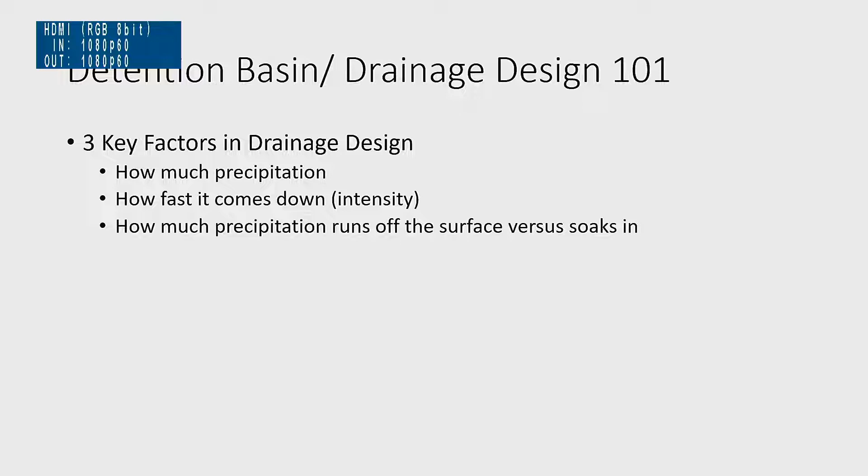In our drainage manual, when you talk about how much precipitation, we narrow it down to design storm events. They're based on statistical analysis of weather records, and the records only go back 100, 150 years. So we do see anomalies, and these numbers are updated periodically by the National Oceanic Atmospheric Administration. If you look at the most recent version, some of these have been changed by maybe a tenth or so, but it's a minor change.

When we talk about these design storm events, we use the term '100-year storm,' and this isn't meant to mean that it's only supposed to happen once every 100 years. Instead, it's meant to mean that it's a storm that has a 1% chance of happening any given year. So it's more of a statistics term.

So if you divide 1 by the return period on that table, it gives you the percentage chance of happening. A 2-year storm, 1 divided by 2, would be a 50% chance of seeing that storm in any given year. Sometimes you see these more often in a year, and typically if the averages are correct, it'll balance out, like in a drought year where you wouldn't see those.

So like to think about it, if you did the 2-year storm, compare it to flipping a coin, 50-50. In theory you're going to see heads every 2 flips, but in reality you might get 3 or 4 heads in a row and then 3 or 4 tails in a row, and that's kind of how a 2-year storm would be perceived.

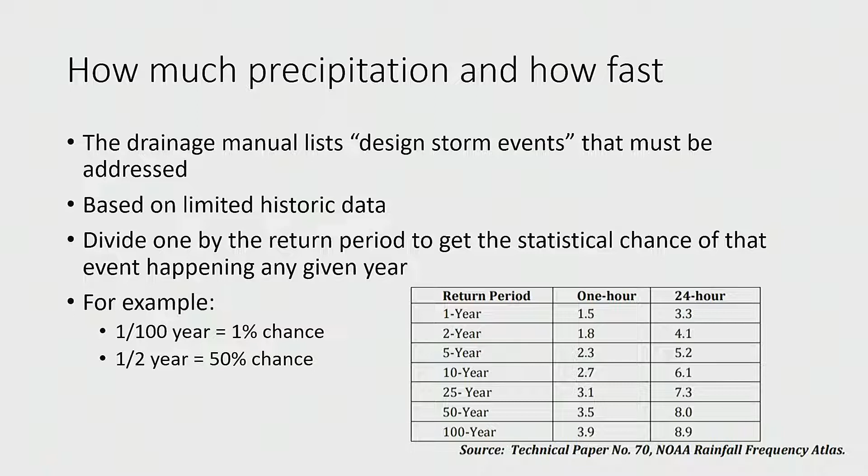Another thing to look at is that we have listed the 1-hour and the 24-hour in this table, but if you look at the charts, there are all kinds of different time periods. I think back in April we had like 3 or 4 inches in a 2-hour period. So you can go look at the charts and see where that compares on the statistics. There's a lot of data out there, but this is just what's in the drainage manual, and the 24-hour is the one that we actually really focus on.

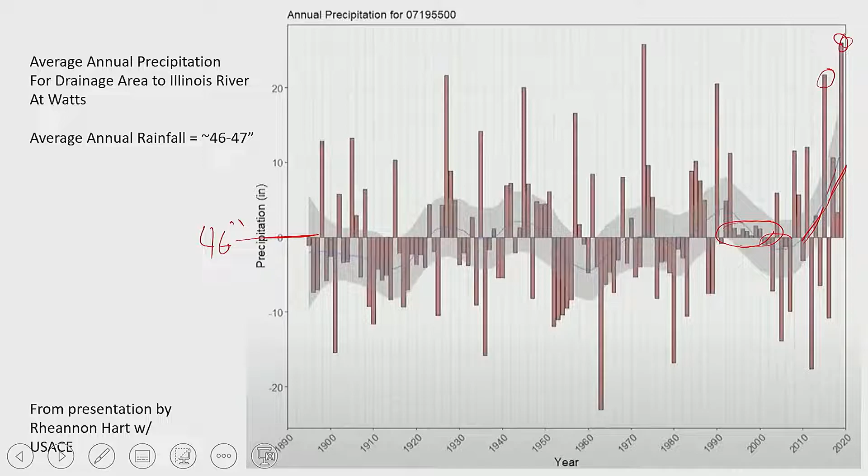For 2019, we compared that with what we recorded at the sewer plant. Someone's out there every day with a rain gauge, and we actually had about 83.8 inches in Siloam that year. And then we had another gauge on the southeast side of town that had 74 inches in 2019. So that could have been the wettest year. We don't have detailed data within city limits, so it's hard to know for sure, but it's definitely up there as one of the wettest years over the last 100 years.

In addition to this annual rainfall, it appears there's also a trend in the Midwest where the rain events are becoming more extreme. The general idea is that we see fewer rain events each year, but we get more rain per event. I've been to a couple conferences where they talk about this more regionally speaking, so I don't have any specific data for Siloam. That's just something I've been seeing some of the government agencies talk about. But regardless of the intensity, the overall annual rainfall has definitely been higher more recently.

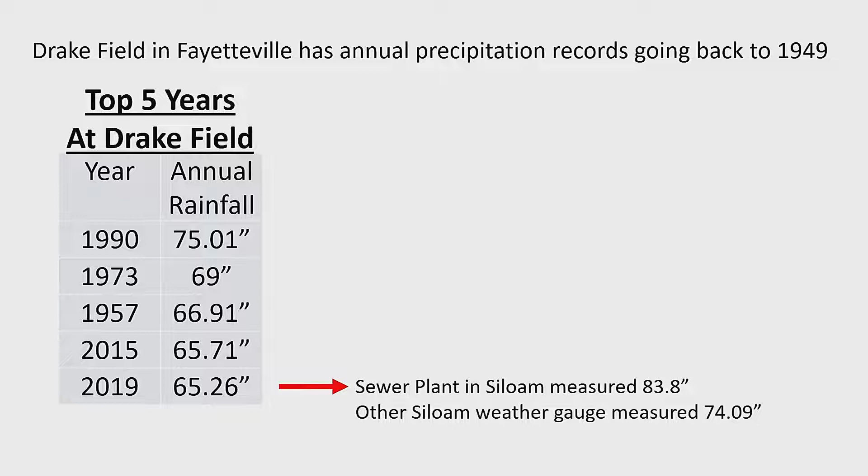So that kind of talks about the precipitation and how fast it comes and how much comes. But the third factor is how much runs off the ground and goes into the ditch and the pipes. The base factor we use to consider this is just what kind of soil we have. Sandier soils have bigger sand particles with bigger voids, so the water can soak through them and drain into the ground faster, meaning less water runs off. On the other end of the spectrum, we have clay soils, which are much smaller and tiny. They compact smaller, and less water is soaked into the ground, so more of it runs off.

So lucky us, we have probably 90% of our soils are high clay content. So we just generally have a lot of water that runs off into the ditches and streams. So what does this mean? Generally speaking, more water runs off the surface into the ditches and pipes, and the water doesn't soak into the ground very fast. But Siloam's always been this way — this is the existing conditions.

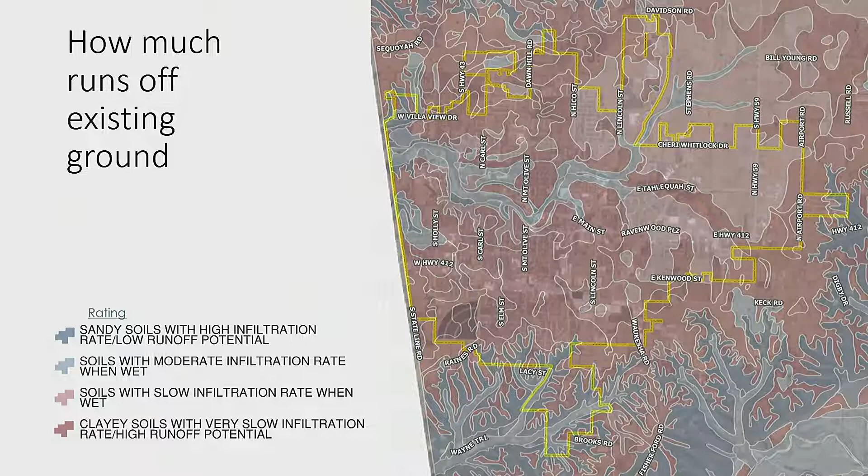So that kind of talks about the summary of the soils, but how do you get from there to what changes with the development? This is the simplified version of all this. But to address this, we look at different ratios for different conditions so that it can be calculated and we can run the numbers.

There are different variations in this — single family versus duplex versus apartments, you're going to see different ratios, but these are just the basic numbers. You can easily see, if you have an open field going to a commercial center, you have over twice as much runoff, and you have to deal with that one way or the other.

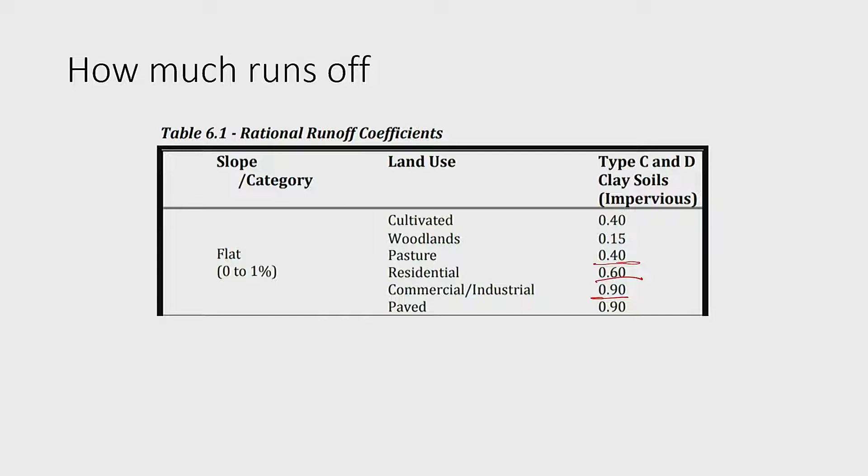So how do you mitigate that? The drainage manual's basic idea behind development is that a development shouldn't increase the peak flow from the site from pre-development to post-development. Typically we do this with stormwater detention, but there's one other way, which I'll show an example of later on — basically by reducing the amount of area that drains to a site in the post-development condition versus the pre-development condition.

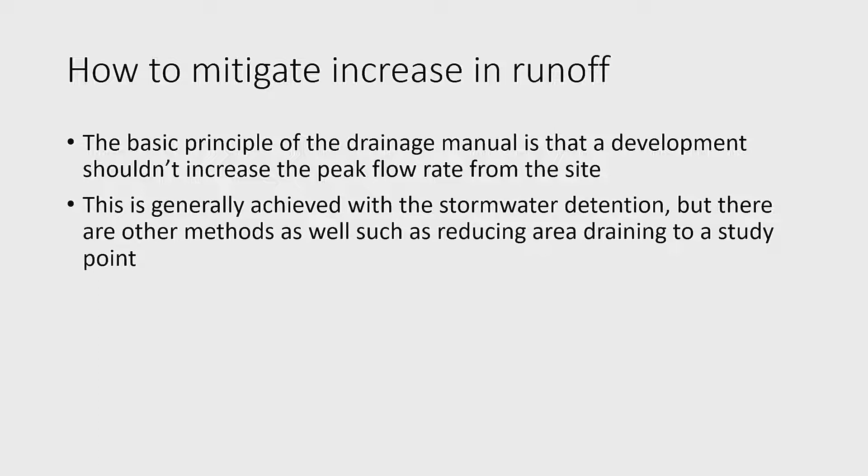So the more common approach is detention basins. The idea is that as you drain all the water to the basin, it slows the water down and holds a certain amount, then slowly releases it out through an outlet structure.

Detention basins are meant to address the peak flows that exit the site, but they don't address any volume difference. You're not really planning on any water soaking into the ground in a detention basin. It's going to be held temporarily and then let out downstream. A lot of times detention and retention are used as the same word, but technically retention basins are intended to actually hold the water and let it soak into the ground, and typically they wouldn't have an outlet structure.

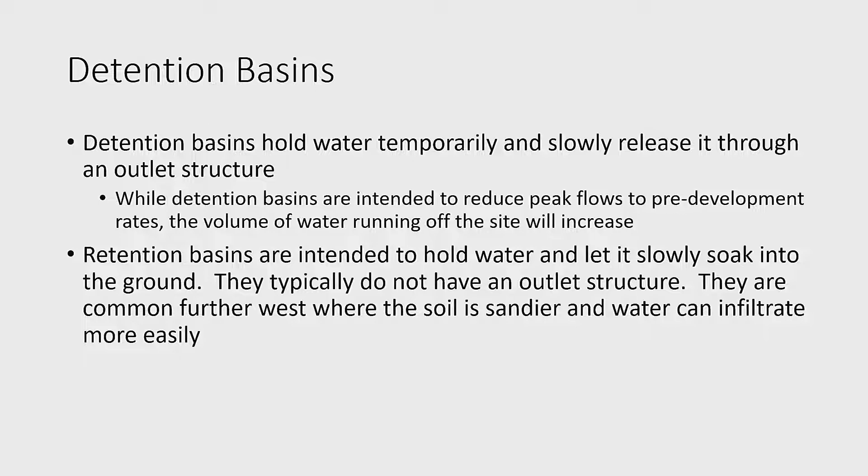I don't know that we have a true retention basin in Siloam. As most of you guys could probably tell, once you start digging down, most of the ground, if it just rains, just fills up and holds the water. It doesn't actually soak into the ground. Out west, like in Arizona, they have sandier soils that can actually infiltrate, and they can address that volume and let it soak back into the ground. But we don't have that luxury here.

Is everybody with me so far on the general stuff? I know this is probably a little boring, but it's just basic stuff here. So just a couple of units that we use for vocabulary. There's really the volume of runoff that we consider, and then the flow rate. Those are the two kind of metrics that we use with drainage.

The volume is the amount that runs off the site. So for instance, if you had a 1 acre tract of pasture land and you get 1 inch of rainfall, you could say that the amount of rainfall that fell is 1 acre inch. It's 1 inch deep over that entire acre of land. And then you can just do those ratios from there.

So like in the previous slide, if 40% of the water runs off and 60% soaks in, you'd have 0.4 acre inches running off. We also use units like acre feet or cubic feet, and those are all kind of interchangeable depending on what your end goal is.

Flow rate is the volume per time unit, so that's more cubic feet per second. That's like what's going underneath the bridge on Sager Creek at any given time—what's that flow rate at that point in time? So those are kind of the two metrics that we're going to talk about here moving ahead.

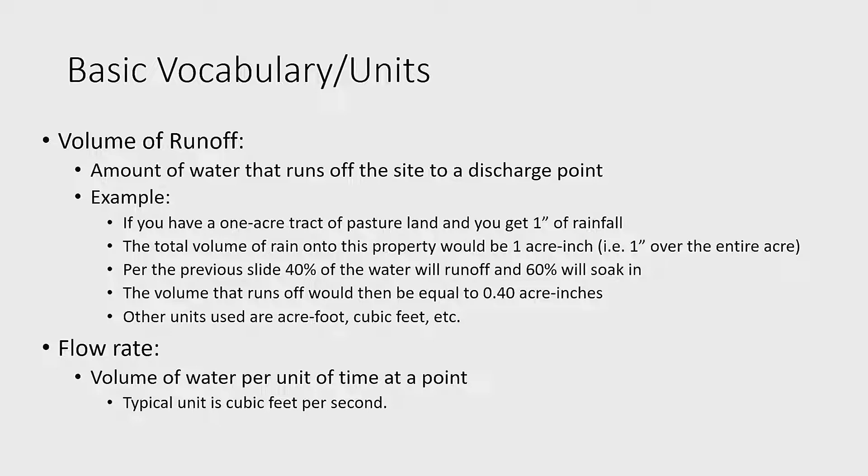This kind of just shows a little graphic, just a basic layout of this. If you assume the yellow line is 1 acre of pasture land on a hillside, you can go back to that 1 inch rainfall over the entire thing. You're going to get 0.6 acre inches of volume that soaks into the ground, and 0.4 acre inches that would drain to the low point of the property, shown here in this drawing.

This low point where all the water drains from the site, that's typically where we do the analysis for any given development. We're looking at where everything collects and where it exits that property. So that would be the point of interest in our drainage studies.

One note on this: if we want to know when the peak flow rate hits that point I circled, you really need that point in time where the entire acre has runoff contributing to it. If this is the high point of the property, that raindrop's going to hit and slowly meander down into one of these little tributaries, and then make its way all the way down here. If it takes 30 minutes to get from the high point down to the low point, that's probably when you're going to see that peak flow rate downstream, and that'll come up a little bit later on. The idea is that you have to have that whole area contributing, in most cases, before you see the peak rate of flow from any given drainage area.

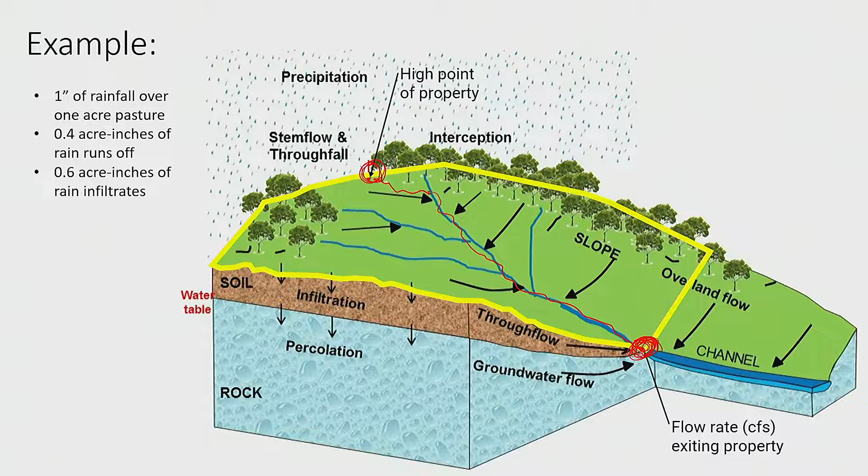This is a simplified example, but the idea is, as it starts raining, if you go back to the other example, we're looking at this study point down here at the bottom end of the hill. So at that point it starts raining, and the water running through there starts ramping up, and then at some point it comes to a peak. Like in that previous example, if we said it was 30 minutes, that's how that correlates. So you get that peak flow rate where the entire acre is contributing to it, and then the rain starts to let up, and the flow rate recedes.

The neat thing about this from the engineering point of view is that when you plot these flow rate curves out, the area underneath the curve is equal to the amount of runoff. There are some handy applications of that we'll talk about later. In that previous example, if you had that acre of pasture, we know there's 0.4 acre inches of runoff. That's going to be the area underneath this curve.

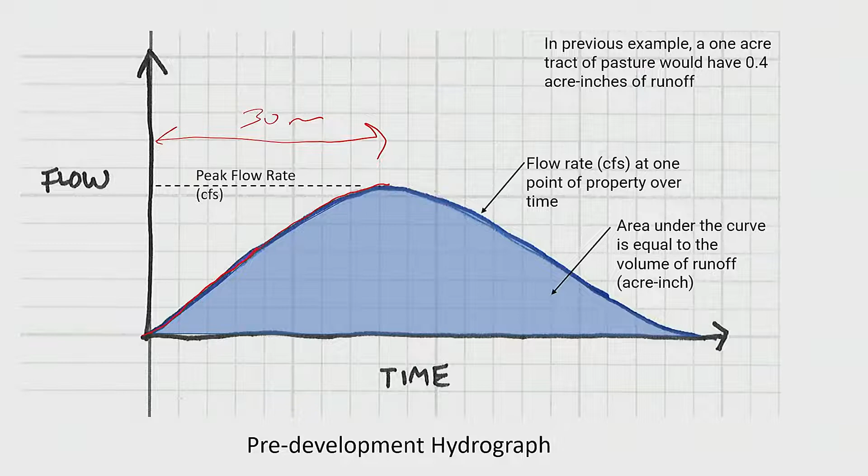So that would be what an existing hydrograph looks like for an undeveloped piece of property. If you were to go in and develop that into a commercial shopping center, that's going to change. You're going to change the patterns, you're going to change how much is coming off. On this chart, the blue is what we looked at before, and the red is this post-development runoff or flow rate curve.

And there are a few takeaways on how this changes things. The first is the peak flow rate occurs more quickly, because as you add impervious surface, pipes, ditches, etc., the water can travel across the site faster. Previously we were coming over here at say 30 minutes before we saw that peak, but now that we're speeding things up, it might be 20 minutes instead.

So you have to deal with that, because that's going to happen. The second thing is that the peak flow rate is going to be higher, and that's just a combination of there being a lot more impervious surface, and it also comes faster as well.

The third thing is, going back to the same point, that the area under the red graph is going to be greater. So if you go back to that one acre tract of pasture land, we knew the pre-development condition was 0.4 acre inches of runoff. And if we look at that chart for the commercial property, it was 0.9 acre inches. So the area under these two curves, probably not drawn exactly that way, but the idea is you're going to have to deal with that extra volume.

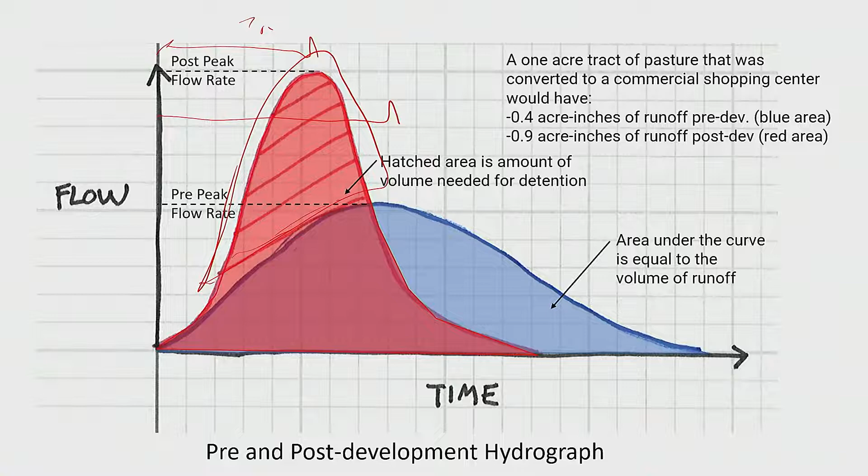So basically, with the outlet structure in the detention basin, you let the water coming out, but then you cap it, and the idea is you would hold that flow rate out of the detention basin so it doesn't exceed the pre-development. That's what we're really shooting for, that you don't get that increase.

But what that doesn't do is take care of any volume. Even with detention, if you go back to that, if you have 0.4 acre inches to begin with, and you go to 0.9 acre inches, you're still going to get 0.9 acre inches of volume running through that basin and going downstream. The detention doesn't address the volume; it just slows the water down so the peaks don't exceed what you had before.

So Justin, does that relate to questions I've had before when citizens come expressing concerns about extra drainage problems when new developments go in? I've asked, will the detention basins in the plan help the existing problems? And I felt like you thought they would, so is that the case? Where there was no detention basin before, could this help even existing problems that were there before? Yeah, even though you're saying the flow, I mean, despite the impacts you just mentioned.

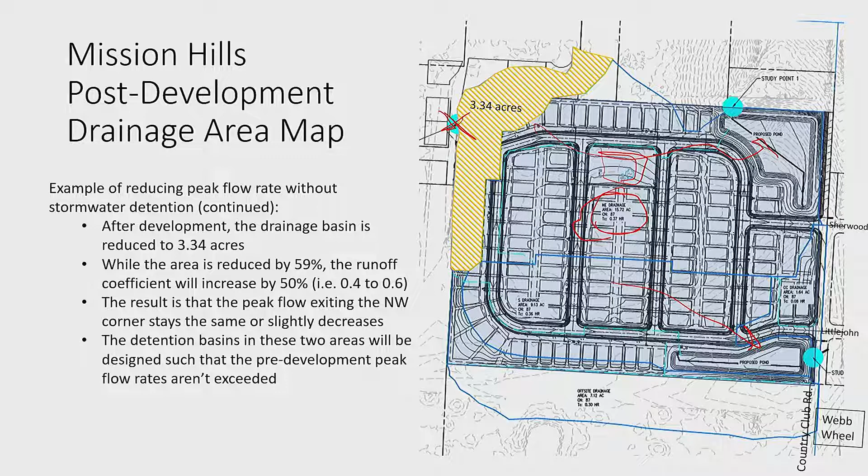And there's homes there to the left of that 8.13 acre area? Is there another addition right there? There is, it's called the Crossing Subdivision. There's a ditch that actually comes down between these houses, with a couple of cul-de-sacs right there. So they're discharging - this property already drained into this ditch that headed west down the hill, so it all goes to the same place it previously did. We're just manipulating it so that even though we're adding more impervious area, we're decreasing the area so that peak rate stays the same or decreases.

So the Mission Hills subdivision has been approved but not started building yet. The one below, Endura Park, that one has started. Mission Hills, I think they just broke ground, they've started work on it. Endura, they've actually final platted and started building homes on it. They are building homes on it.

Justin, the other thing to note on that northeast is if we go back a couple of years on Sherwood and Little John, those developments there, and the neighbor right to that northeast detention pond who didn't want Siloam to develop because they wanted to live in the country for the rest of their lives, but next to the city limit. Davidson Road, that is the lowest point - and I'm just speaking specifically for Ward 2 - the lowest point for the largest discharge where we've gotten the most complaints in the county. I think we can clearly say that.

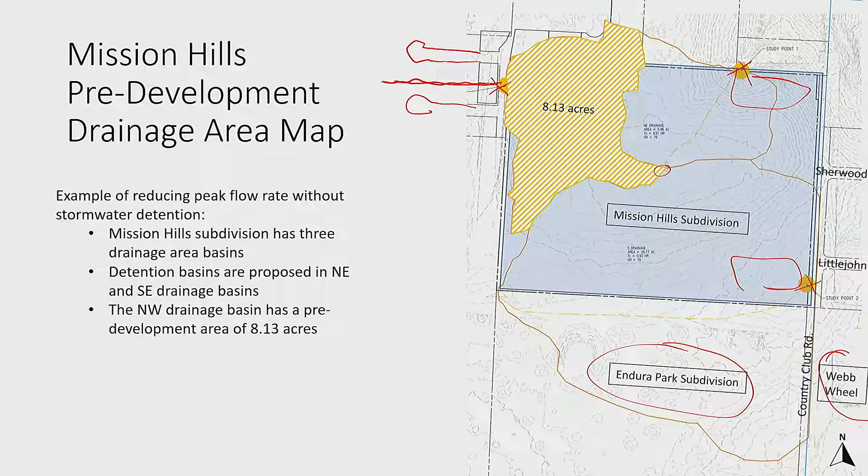So on that basin you're talking about, I actually use that as an example. I did want to mention, while I have the opportunity, I get a lot of feedback that detention basins aren't working because they don't fill up every time it rains. I just wanted to make it clear that these are designed to accommodate the 2-year event through the 100-year event. So unless we get 9 inches in a 24-hour period, it's not expected that you'd see most of those ponds full of water. You may only see, in 90% of the storm or rain events we get, maybe a foot of water in them, and that's expected - if they were designed to hold that much water with just a 2-year rain event, when the 100-year event came, you'd already be using that volume. So you need to keep that extra space for the bigger rain events as they come through.

And then just to talk through this table here - this is actually that northeast pond that Brad was talking about. Each row is a different storm event. Just real briefly, if you look at the second column, that's the post-development inflow, so that's basically after everything's built, what's draining into that pond. For instance, in the 100-year event, you've got 91 CFS going into it. Then the post-development outflow is what's exiting that outlet structure from the pond after it's detained, and you can see it gets dropped down to 19.5. So they've really over-detained that, is what we call it.

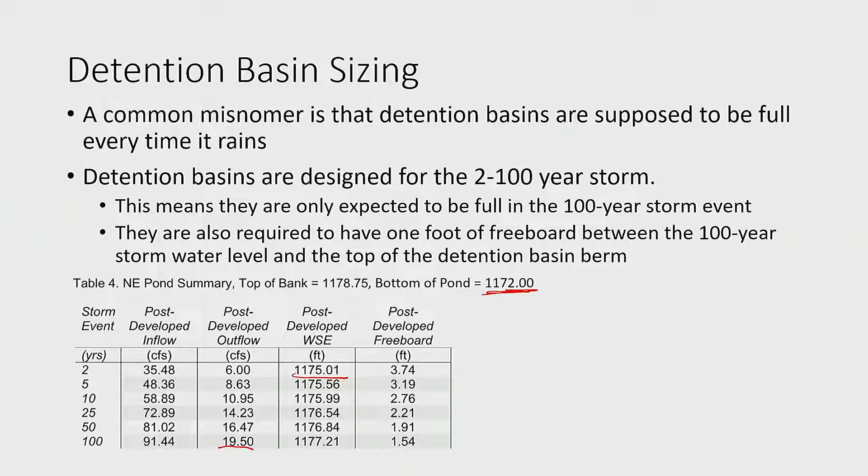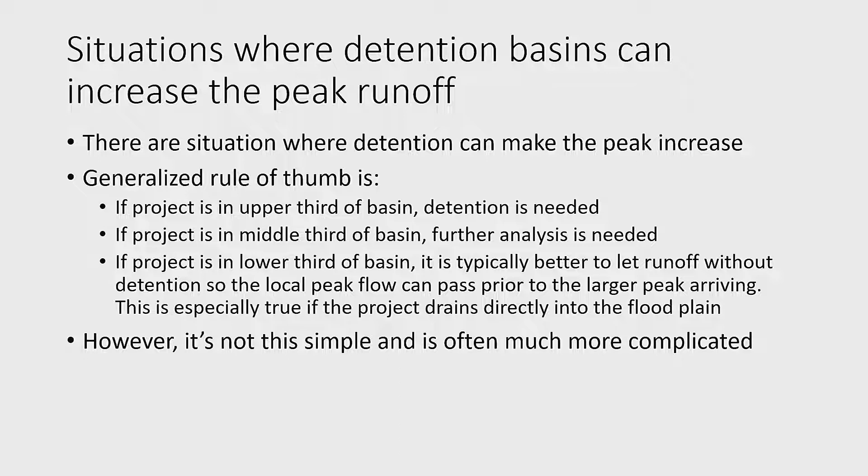Just the last thing—I know we're getting a little short on time—but I wanted to mention there are situations where detention basins can increase the peak runoff from an area. As a general rule of thumb, if you're in the upper third of a drainage basin, you typically always want detention. If you're in the middle, it needs to be analyzed. And if you're in that lower third, it's possible that detention could make it worse. So a lot of times when you're at the very bottom of the hill, maybe you don't do detention, and that's actually better. Just to show that, this is a big map here.

The yellow is the area that drains to Sager Creek as it crosses the state line. It's a big area.

Historically, John Brown University hasn't done any stormwater detention on their campus, and that's basically because they're so far downstream and adjacent to the floodplain. It actually makes it better for them to just discharge and have the peaks from their site get into Sager Creek and move on before the bigger peak from upstream arrives. The peak is when that whole area is contributing—it's going to take time from over past 59 and north of Bill Young Road for all that area to meander its way through town. So it's much better for JBU not to do detention in that situation.

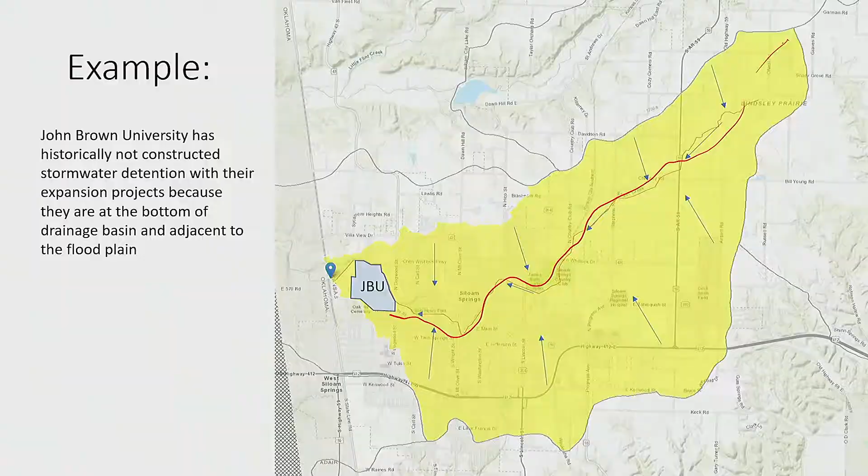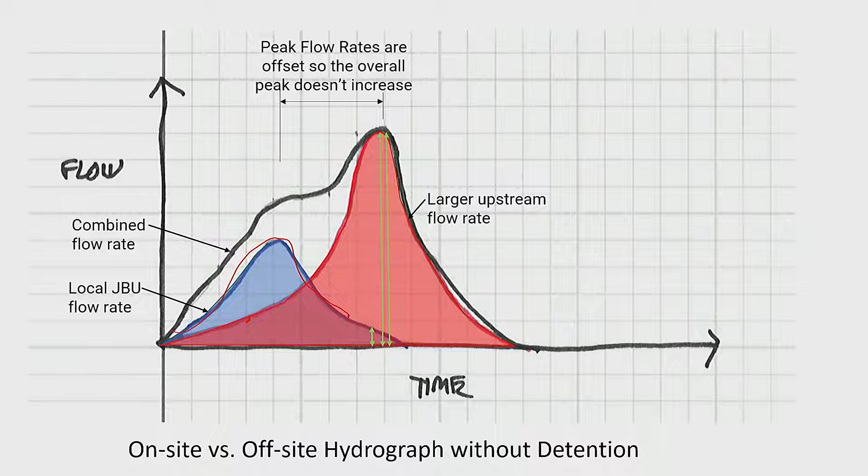Going back to the engineering way of looking at this, these hydrographs—again, simplified—without detention, the blue would be the flow rates leaving JBU, going up and down, and the red would be the off-site flow. If you combine these and add them at each point, you'd create that black line. So by not doing detention and having an offset in those peaks, you're not increasing the overall flow. I'm rushing through this, but just to get the idea across.

This next slide shows that if you detain that peak and sustain it so it overlaps with that bigger peak upstream, you can actually increase the flow—because even though you're letting off less water locally, it's overlapping with that bigger upstream peak. It does happen occasionally. It doesn't come up very often, but it is something that does come up.

But I think I went over on time here, so.

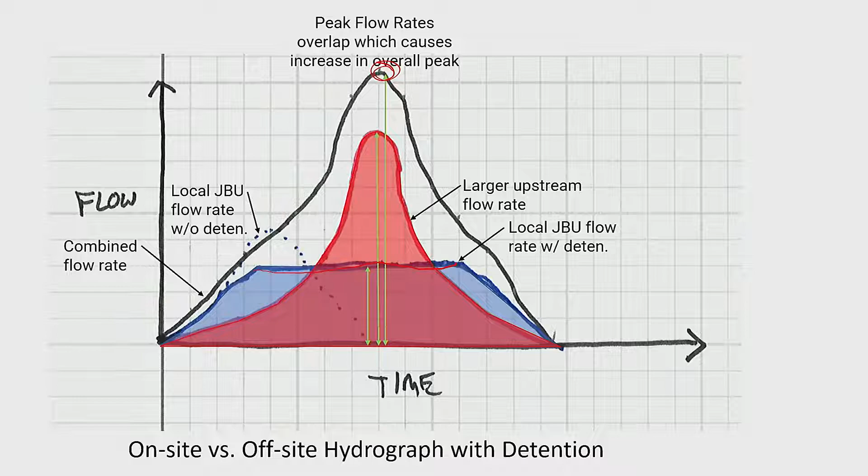Justin, just on that note, the board sees these developments come through and there are always issues of drainage, always concerns. The majority of them are going to have detention basins, but there would be some in that lower third of a basin where it wouldn't be appropriate to have that detention pond, just like with JBU. It's not because you're not doing your work and looking at the drainage system—it's because that's the way it's best designed, so it doesn't create that high peak flow or increase the peak flow off of that property. That's exactly right.

But they still struggle with a few things. If you go to the northwest corner of the walking trail, you could see where their drainage, what drainage they had, it ruts it up. As we add more hard surface, even those being connectivity paths or whatever, you could see Mother Nature finding her own way to work around those things.

Yeah, absolutely. Well, and that whole area through there is in the floodplain, so we put trails through there. We know it's going to flood, but in the retention ponds, and we've talked about safety, but the other thing, I think Reed, and I think it's still on topic, at least for me.

We went out to Sager, and we started looking at some different things that they did out there. Let's use the one off Washington Street that sits behind Steve Hill's house. Steve's, the big one there, I think it ended up discharging by the new facility we bought, right? So eventually it makes its way across Lincoln Street by the revenue office. So with that really massive one up there, we clear cut it down, and it's unsightly. Philip and some staff was there, and we talked about whether certain vegetation helps hold or filtrate that water.

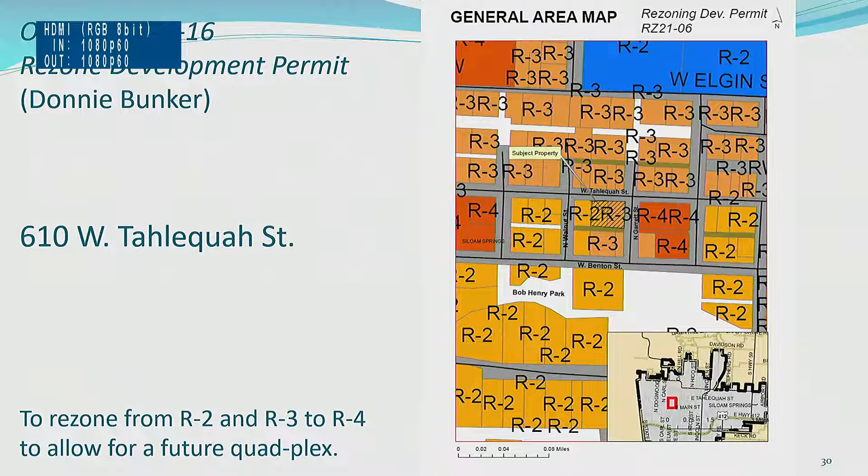Yes, thank you again, Madam Mayor and members of the board. For your consideration is a rezoning to R4 for property located at 610 West Tahlequah Street. This is north of Bob Henry Park near the existing Quaker townhomes. The rezoning is for the whole lot that was recently consolidated into a single lot. There currently are two zones on the property, the R2 and R3 zones. The proposal will allow for the existing quadplex, which was built in the 1980s, to be brought into conformity with the zoning.

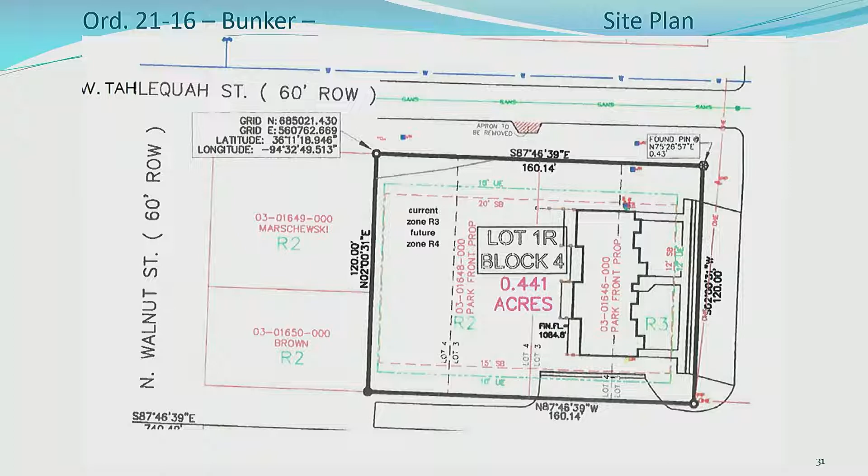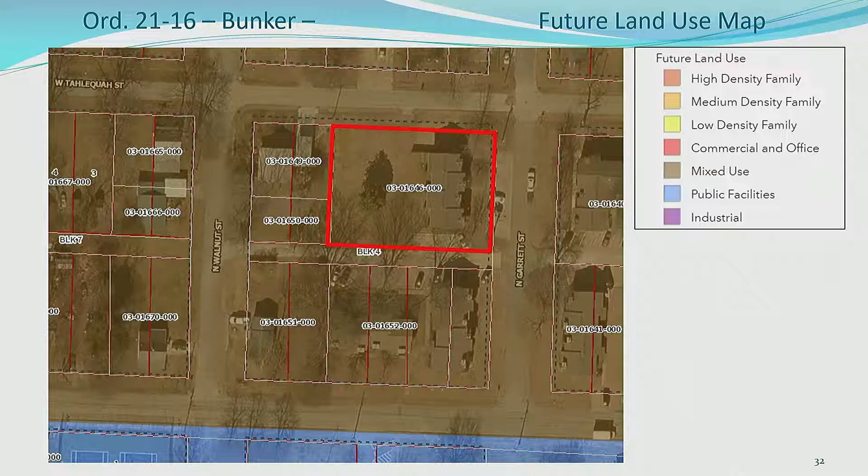And here is the future land use map. You see that the whole area is designated as brown, which is mixed use, which allows for multifamily housing as well as some commercial.

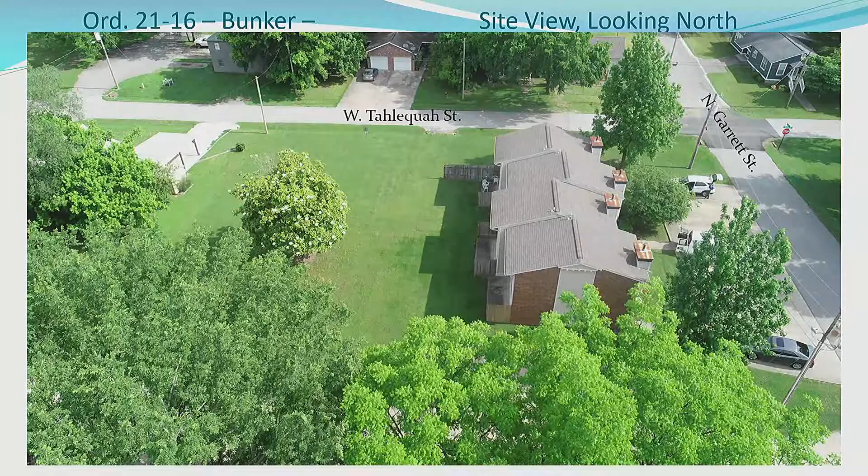And here you see the site. This is looking to the north. As you can see, there's a large open area behind the existing quadplex here. This area will be developed for another similar quadplex project. We did receive a site development permit for this yesterday, which is currently under staff review.

Staff and the Planning Commission looked at this, and we are recommending approval with no conditions, and we are available for any of your questions. Thank you, Ben. Is there anyone in the audience that would like to comment on Ordinance 21-16? If there is not, directors?

Madam Mayor, if there aren't any questions. Yes, there are apparently no questions, so do you want to make a motion?

I move that we place Ordinance number 21-16 on its first reading, suspending the rules and reading by title only. Do I have a second? Second. We have a motion and a second.

Roll call: Carroll, Yes. Sappington, Yes. Smiley, Yes. Burns, Yes. Hunt, Yes. Whistler, Yes. Allen, Yes. Philip?

Ordinance number 21-16, an ordinance amending section 102-21 of the Siloam Springs Municipal Code City Zoning Map, rezoning from R2 and R3 to R4, property located at 610 West Tahlequah Street. Thank you.

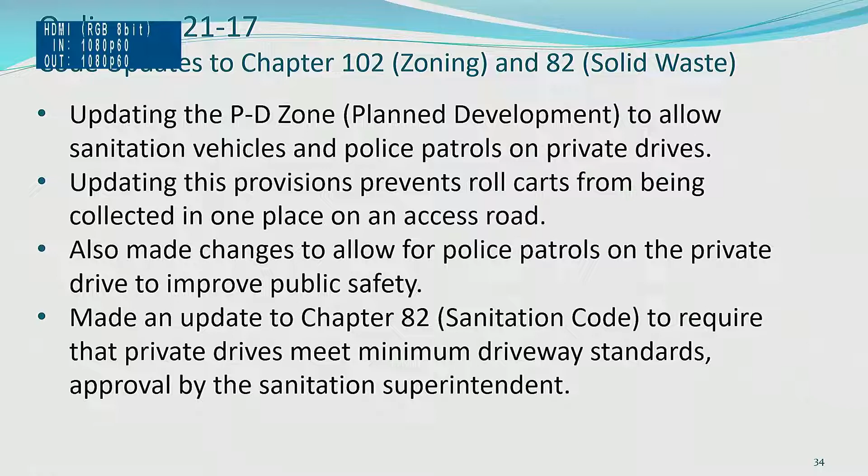Next is item N, Ordinance 21-17, first reading, amending City Municipal Code, Chapter 102, Zoning, and Chapter 82, Sanitation, Private Drives. Thank you again, Madam Mayor and members of the board. Before you is a code update to the planned development zone with respect to private driveways within that zone.

The proposal is to allow for sanitation vehicles and police patrols to use these private drives. The driveways under consideration are those found within a planned development, not drives for individual homes or businesses. An example of a driveway like this would be one servicing an apartment complex.

The current rules in the PD zone prevent the use of sanitation vehicles on privately owned driveways, so the updated provisions will allow for the roll carts to be picked up in the development rather than a single collection place for all the roll carts on the access road, which, as you would imagine, would block traffic for a considerable amount of time if there are many units within that development.

The current rules also prevent routine police patrols on these private drives. Again, this is only in the PD zone when this is happening. So staff is proposing to remove these specific restrictions for the PD zone's private drives.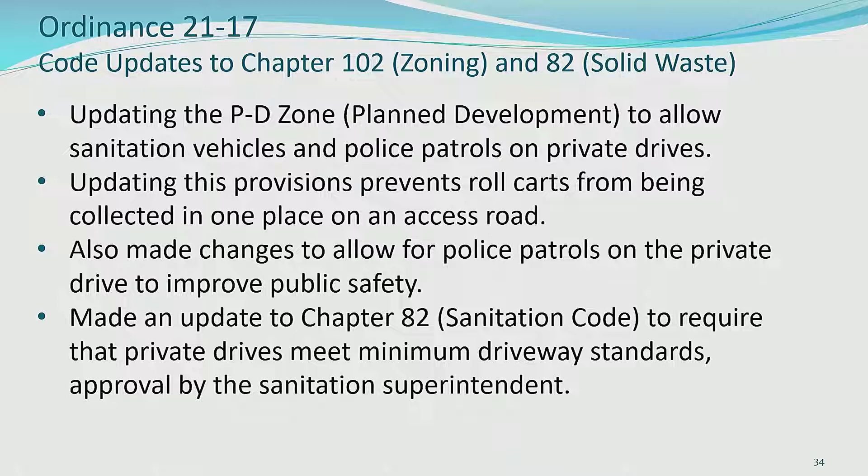To balance out this change, we are suggesting an update to the rules within Chapter 82, the sanitation code, on the minimum driveway standards so that any proposal must be approved by the sanitation superintendent. That would be to ensure that if there is a development that has substandard driveways, we would want trash trucks to be able to navigate those safely and effectively.

Looking specifically at the code changes proposed, the red is what's proposed to be deleted out of Chapter 102. This is the section on private drives, specifically saying what the city will not do on those private drives, and we're crossing out the trash and recycling pickup and also the police patrols, as I was discussing.

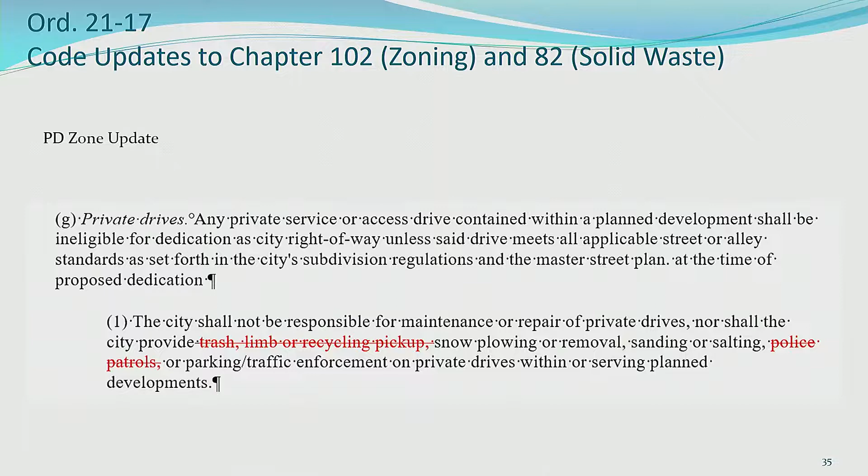And then here is the excerpt from Chapter 82 on solid waste. I won't read through all that, but it's essentially saying that the sanitation superintendent will check these driveways, ensure that they have the minimum standards for their purposes.

In summary, we believe that these changes will allow for better development outcomes in the planned developments, which want to make use of private drives rather than dedicating a new street for city maintenance. Staff and the Planning Commission are recommending approval, and we stand ready for any of your questions. Thank you, Ben.

Is there anyone in the audience that would like to address or make comments on Ordinance 21-17? If there is not, directors, any comments or questions?

Madam Mayor? Yes. Ben, you mentioned in your staff report that the city staff was recently made aware of this issue. I'm just curious, was this a citizen concern or a landlord concern or the sanitation department concern? Where did this come from?

That's a good question. We had a development proposal. It never surfaced as something that went through Planning Commission, but it was just initial inquiries. When we were reviewing the development proposal, it was in a PD zone or proposed PD zone. It became obvious that when we started applying that section of the code, we said, well, we can't have sanitation vehicles come into this development, and that was going to cause big issues on the road where this development was planned, because the sanitation vehicle would have to stop on the road and pick up 20, 30 different units that would all have to be rolled out to that road.

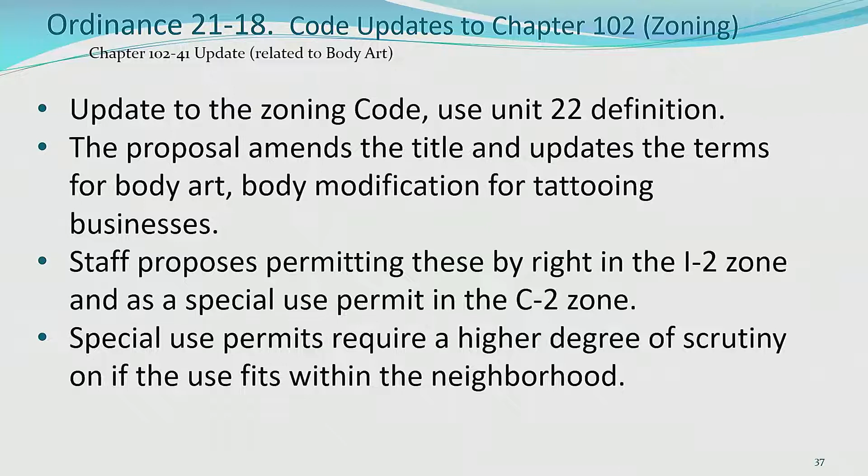With that, Planning Commission and staff are recommending approval of the update as presented, and we are available for any of your questions. Thank you.

Thank you, Ben. Is there anyone in the audience that would like to comment on ordinance 21-18? There is not. Directors? Madam Mayor?

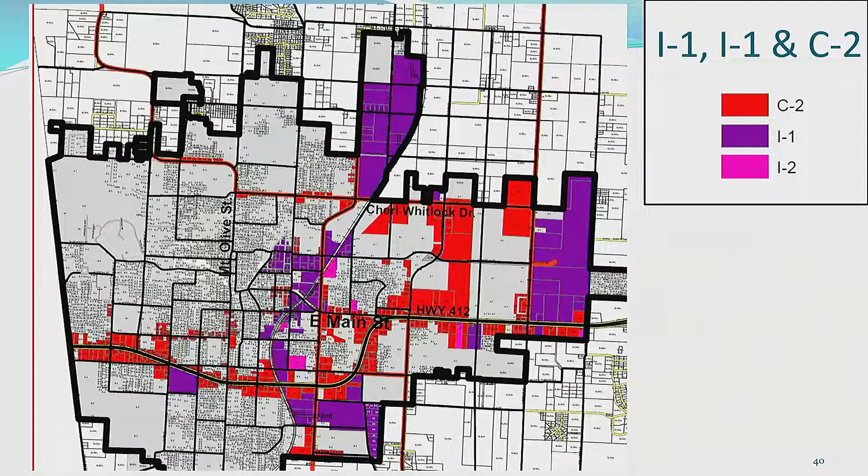Yes. I asked for this to be brought to the staff, and I appreciate your work on it, Ben. And I know that it will help when we get some people questioning if they can have the type of business that they wanted to have. It was just, industrial was just too dirty of a location for something that needed to be clean, and I appreciate this a bunch.

Thank you, Marla. Anyone else? Madam Mayor? Well, I think I said before, and I'll say it again, I'm tired of the baby steps. I appreciate the work. I'm gonna be a no vote, because I think it needs to be in some of these historical buildings. These type of shops are about environment and atmosphere, and the majority of them nowadays are appointment only, just like an attorney downtown is appointment only, works 2 days a week. The prices that they charge, I think we're living in a stone age when we think of what that is. And I know that labels me. I think it's a generational gap, and I think it's just a different thought process.

I will go back to body piercing. There are facilities in town that you can't regulate what they're piercing, but in our purity of our minds, we like to think it's ears. And I think in Siloam, it makes us feel good. So I think this will come back up, maybe not in my tenure on the board, but this will come back up in a few years, and I hope we get it in some of these locations downtown that need to be filled in. Thank you. Anyone else?